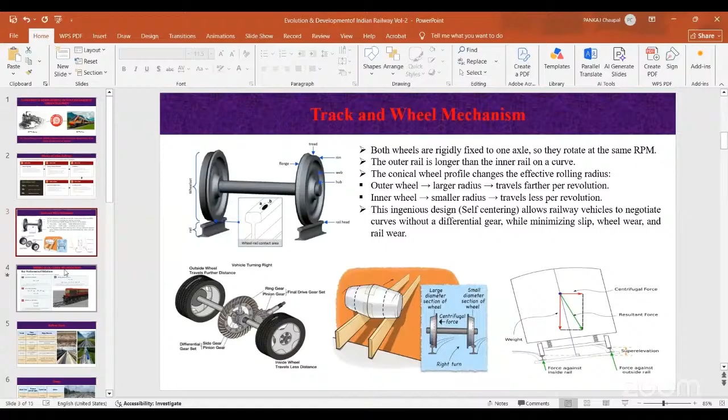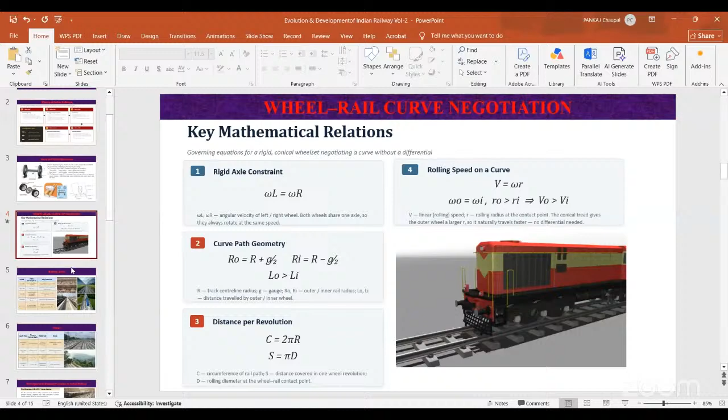As the radius changes, the distance also changes. Because of this, the negotiation of curves has been done by rolling stocks. So moving further, the track is also one of the important aspects of rolling stock.

Initially, when the track was developed, the sleeper was wooden and the track was of iron. Then it was further developed, and the sleeper became concrete, while the track or rail was made of steel.

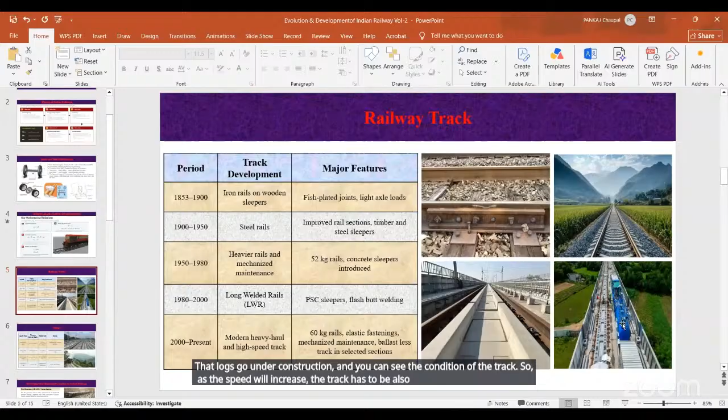Similarly, in the initial days, if you look at the length of the track in mountain or hill areas, there was a gauge called narrow gauge. The distance between the tracks was nearly 762 to 610 mm.

But the standard track followed in Indian railways is broad gauge. The distance between the inner portions of the two rails is 1676 mm. Throughout Indian railways, this 1676 mm standard gauge is followed.

However, in Himalayan railways or Darjeeling railways, there are still narrow gauge trains because of the mountainous or hilly regions.

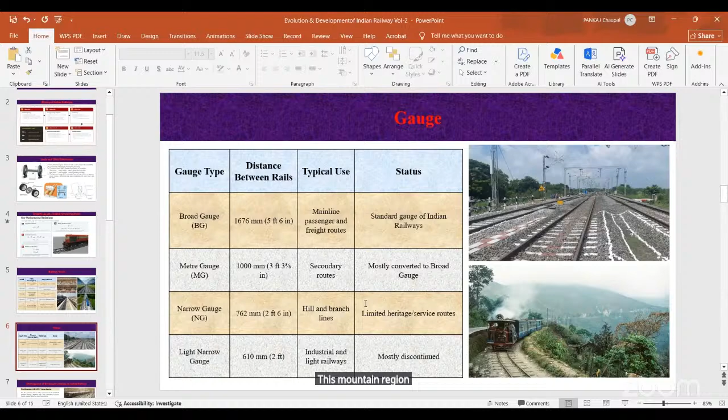Further, moving towards the development of passenger coaches, as we know the first passenger coach ran between Mumbai and Thane in the year 1853. In that, the coach body was made of wood.

The wooden coach body was mounted on a steel frame structure, and the speed of the train was very low, nearly 30 to 40 kilometers per hour.

The drawback of that train was poor crash worthiness, meaning when there was a collision, the train would easily be damaged and passengers would be affected. Similarly, since it was wooden, it was susceptible to fire hazards. Passenger comfort was very low, maintenance was very high, and there were no toilets or bathrooms. This was the first generation of trains.

Then it was developed further into the second generation. The coach body was introduced as a steel body mounted on a steel frame, with the suspension frame also made of steel and mounted over the steel body. The advantage of the second generation train was improved safety, better suspension, and for the first time, toilets were introduced in the system. The speed of the train was nearly 60 to 80 kilometers.

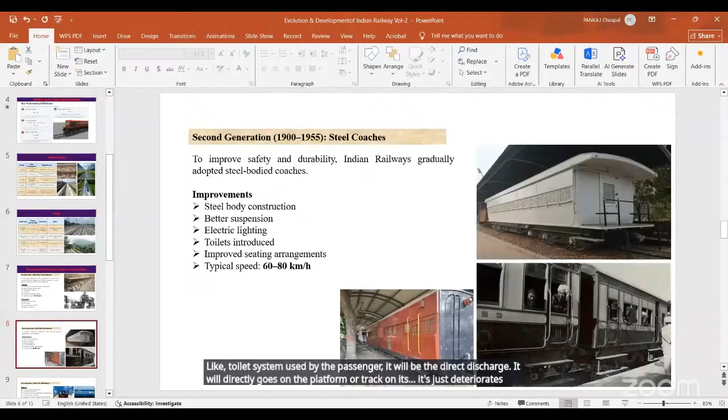So it was further developed. The first indigenous train was developed in the year 1955 by ICF. ICF means Integral Coach Factory, situated in Chennai. That was the ICF train, as you can see in the figure.

The ICF trains in the initial days were of blue color. Further, it was developed with certain modifications and converted to a light yellow color. In these trains, for the first time, coil springs were used, providing certain suspension due to the coil.

As these trains were introduced with a screw coupling, as you see in the first figure, this is the screw coupling. The braking system was mounted on the flange, like the thread of the wheel. If the wheel is there, the wider portion is called the tread, and the braking system was applied on the tread with the air braking system.

It was Indian designed by ICF, so it had lower production cost, maintenance was easy, and because it was indigenous...

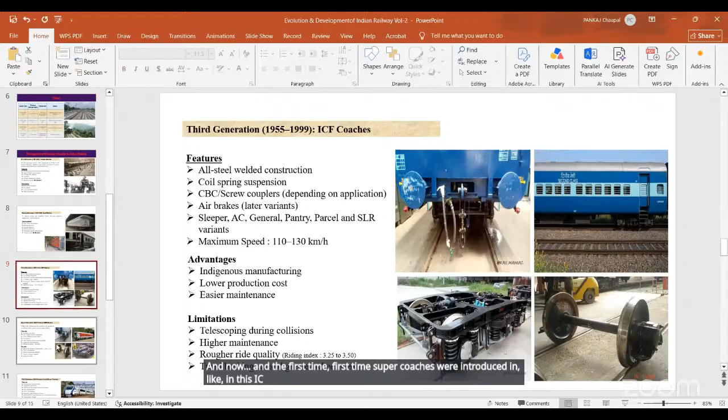Then moving to the fourth generation, the Indian government procured the technology for LHB, Linke Hofmann Busch, from Germany. India purchased the technology for building this new version of the train, and RCF Kapurthala started the manufacturing of LHB coaches.

The difference of these LHB coaches with the earlier ICF coaches, which was the third generation of coaches, was that in ICF coaches, the brake was applied on the tread. But in LHB coaches, if you see in this third figure...

You can see that the brake disc was mounted on the axle. Instead of applying the brake on the wheel, it was applied on the disc. This was developed because when the brake was applied on the wheel, there was continuous friction between the wheel and the brake, causing a decrease in the diameter of the wheel, leading to a decrease in the life of the wheel.

Generally, the initial diameter of the wheel will be 950, and further it will reduce to 825, at which point the wheel has to be condemned. So this modification has been done in LHB coaches.

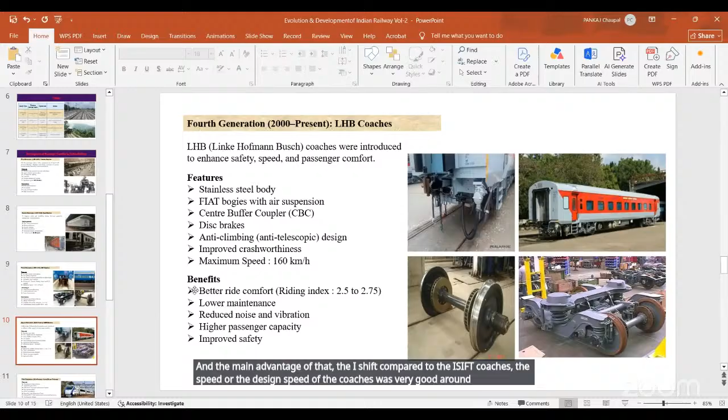Further advancement in the latest generation, since year 2000 - actual development started in 2019 - is the latest development in Indian Railways, the Vande Bharat trains. Initially Vande Bharat trains were developed, then it was followed by Amrit Bharat. Since Vande Bharat trains have a very high fare, the Indian government developed Amrit Bharat, which is a fully non-AC train with a much lower fare cost compared to Vande Bharat.

Then further it was developed, because Vande Bharat trains were used for lower distance, one-day journeys. So to accommodate longer route journeys, sleeper Vande Bharat trains are now being developed. Two sleeper Vande Bharat trains are running so far, and the sleeper Vande Bharat is currently running between Kamakhya and Howrah.

Now I'll discuss the advantages and technology of Vande Bharat trains. If you compare conventional trains, either ICF or LHB, we see that every train has a separate engine mounted, and with the engine we arrange a coupler to the coach. Through that, power supplies go from the engine to the coach so AC, fan, and light all work.

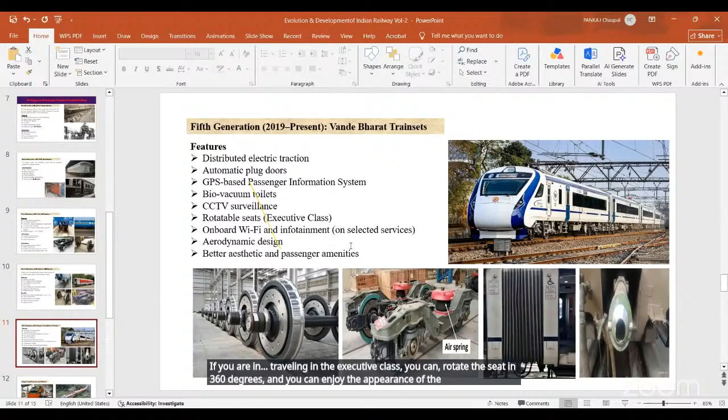Coming to the sleeper Vande Bharat, the mechanical technology is almost the same. The same wheel and same bogie are used in the sleeper Vande Bharat. The only difference between the chair car and sleeper Vande Bharat is that the design of the passenger area is made so that passengers can use it for sleeping. The design of the seats is different, but the design of the toilets is almost the same, and the IC doors are almost the same.

But the thing is that additional time required for the opening and closing of the engine with the rake is minimized. So this is also an advantage.

As I told earlier, the price or fare of the Amrit Bharat trains is much smaller compared to the sleeper or chair car Vande Bharat trains. Mainly this train is developed for the lower middle class people of India.

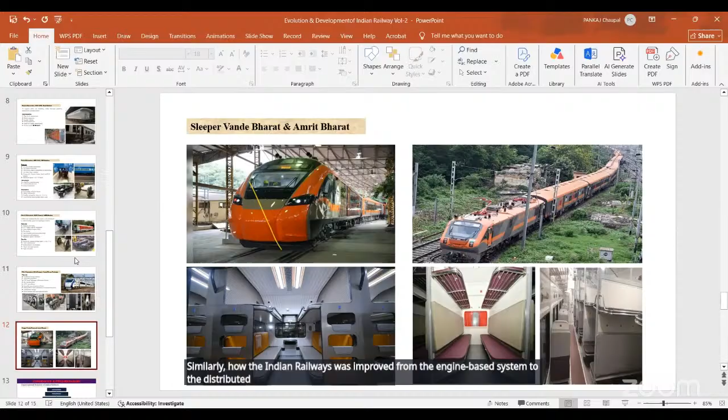We have seen that. Now in the next slide we will see the opportunities, governance and hierarchy of Indian Railways. This slide is beneficial for students, especially if you want to work in Indian Railways, so I want to discuss how the opportunities are.

For joining these cadres, when vacancies come for different posts, there are different qualifications required. But generally, if you have 12th plus ITI, you can start your career in Indian Railways. If you are a graduate of any university, you have the option of joining the supervisor cadre as well as the officer cadres.